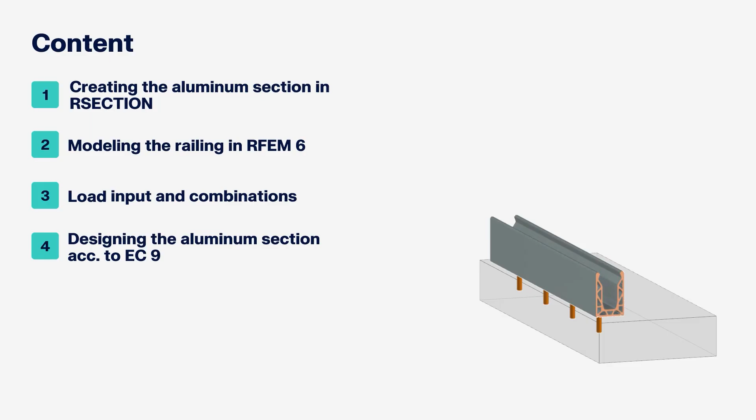The focus is on an aluminum base profile. This profile is anchored to a supporting surface with screws. The glass panel is fixed in place using clamps within the base profile. Step by step, I will demonstrate how to model the system in RSECTION and RFEM and how to design it.

Using the aluminum design add-on, I'll compare two different modeling approaches, one using members and the other using surfaces. The goal is not only to show you how the software works, but also to highlight how the modeling approach influences the structural behavior and ultimately the design results.

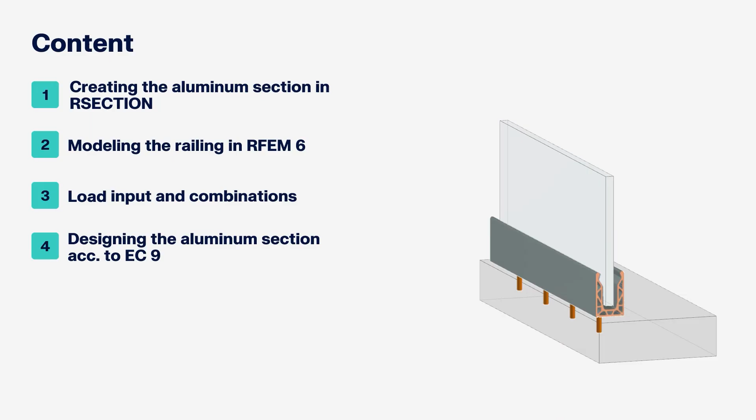Cross-sections in RSECTION can be created in various ways: via graphical or tabular input, by importing a DXF file, or using a script or the API. In this webinar, I will show how to create a cross-section using a DXF file. To do so, I open the import dialog via Import DXF, and then I choose the corresponding DXF file.

Three import methods are available with the Create DXF Template for further editing. The lines in the DXF file are imported as simple lines, which can be used as modeling aids. The other import options automatically generate elements. These are required for section classification, effective cross-section calculation, and thin-walled analysis. They are also necessary if the section will later be converted to a surface model in RFEM, as only elements are converted into surfaces, and the surface thickness corresponds to the element thickness.

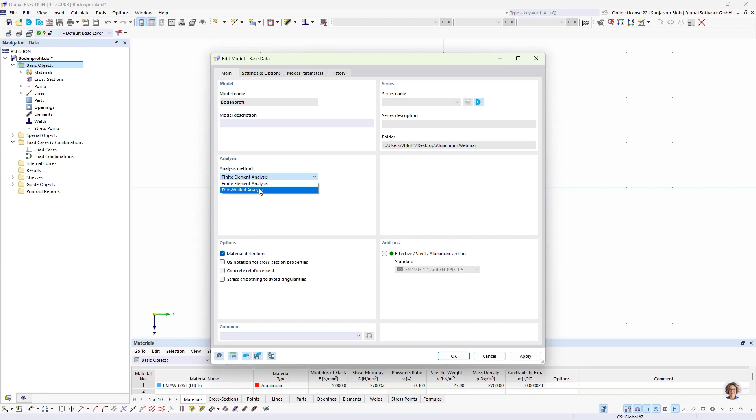In the base data, I select the analysis method. Two options are available: the finite element analysis and the thin-walled analysis. I opt for finite element analysis. Next, I create the part, which is required for all analysis methods in RSECTION.

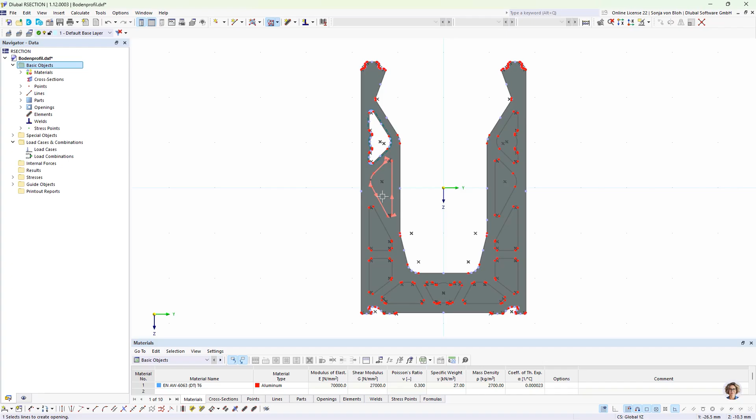Using the Select Boundary function, I select an outer contour of the cross-section, and then the part is generated automatically. I then define an opening, also using the Select Boundary function, clicking on the corresponding lines to create the openings.

To improve clarity, I hide the parts and openings in the display navigator. Next, I create elements, which is necessary for cross-section classification and for use in the conversion to surfaces. Since the section is symmetrical about the z-axis, I model only half of it and create the other half using mirror. I generate elements with the function Create Center Elements between parallel lines.

Only two parallel lines need to be selected, and then the element is created automatically. Its thickness is derived from the spacing between the lines. I will do this for all elements now.

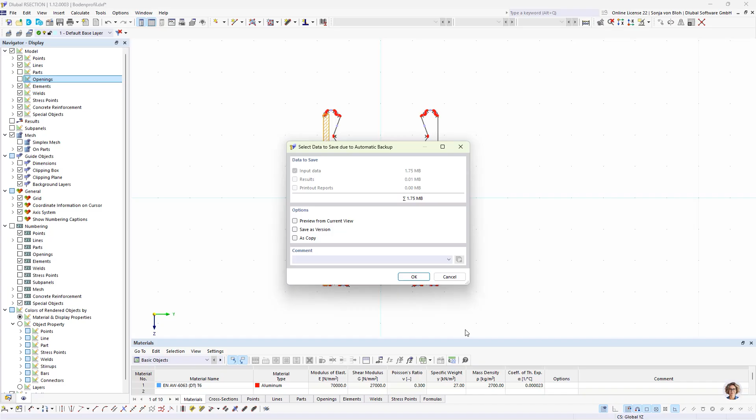Afterwards, I extend the horizontal and vertical elements on both sides. For this, I select first the horizontal elements and then the vertical elements, and use this function to extend to the next line or element. Here I extend both element sides. I do the same for the diagonal elements, selecting first the elements which I want to extend.

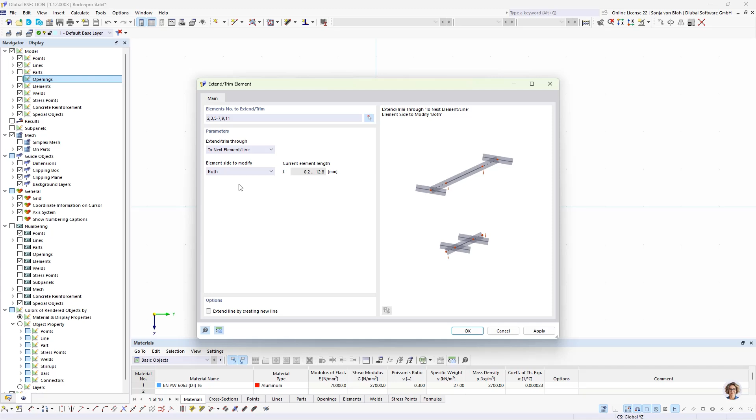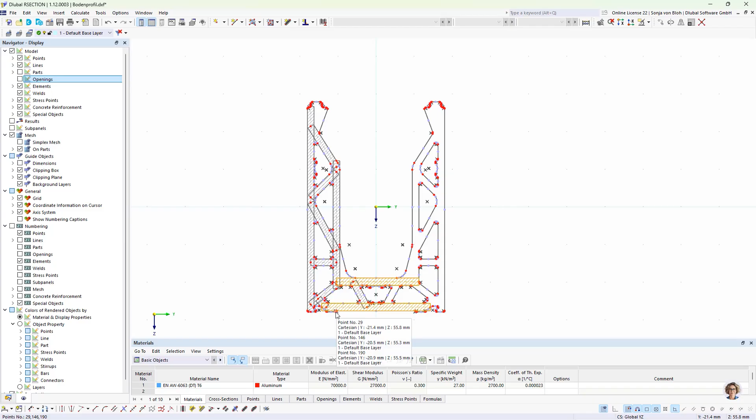And then I choose again this function to next line or element, and I modify both elements sides. Since I only want to model half the profile, I shorten the horizontal elements, these elements, by setting the y coordinate of the 2 points that you see here to the 0 point.

The elements are not yet connected. To do this, I use the connected lines and elements function, and I select the entire cross-section using a selection window. I delete 2 redundant elements, here this element, this.

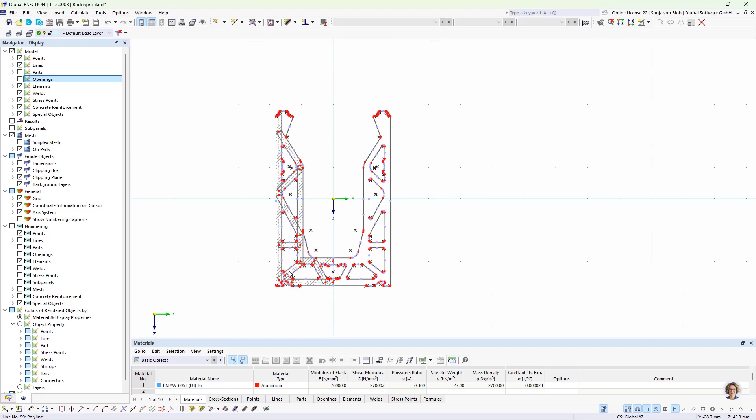Then I select all elements and choose now the mirror function. I want to create a copy. Mirroring axis is the z-axis and the point is the 0 point.

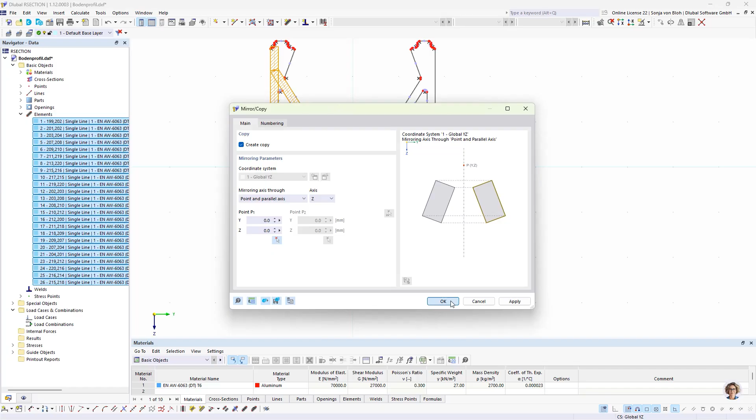Now the cross-section is complete, so I can save this cross-section. And then I move on to modeling the railing in RFEM.

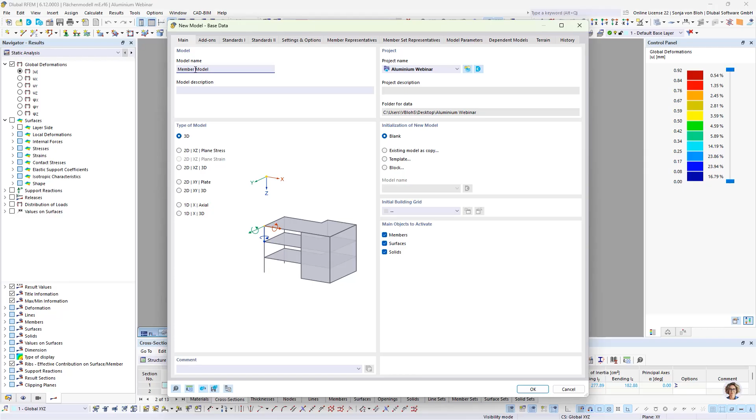First, I show the creation of the base profile as a member with a glass pane rigidly attached. I create a new model via File, New, and I name this model Member Model. I select the type of model 3D.

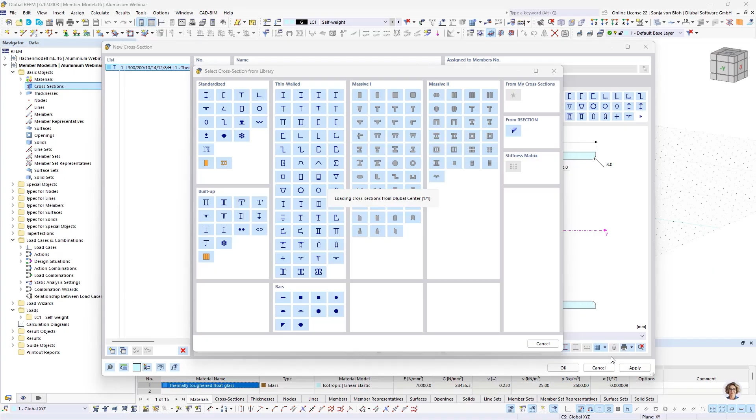I then import the aluminum profile via New Cross-Section. I open here the cross-section library from RSECTION, and then I choose here the base profile. The material defined in RSECTION is retained.

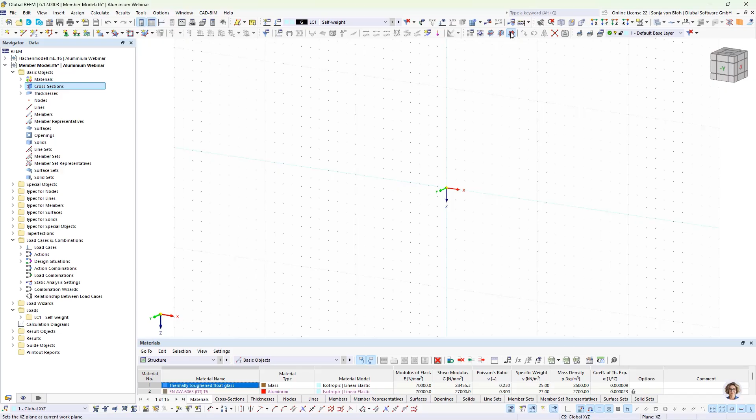I set the work plane to XZ and enable the view in negative Y direction to simplify modeling.

The member is created using this function single general. Here I choose this RSECTION, cross-section, and I use the input mode length and direction. Here I define an angle and work plane of 90 degrees and a member length of 1200 millimeter.

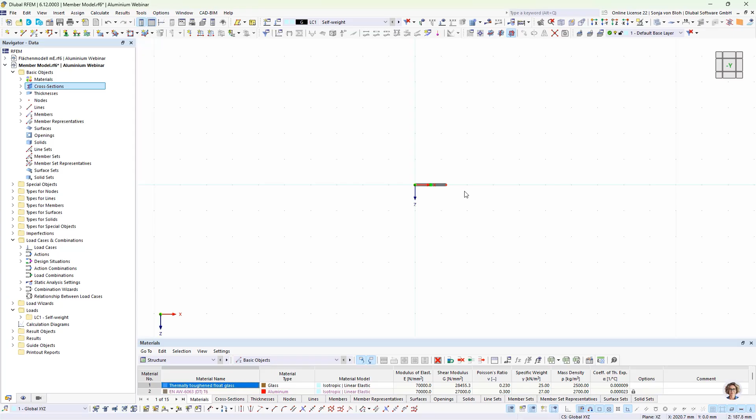Now I create the glass panel. I select the member line and use then this function move copy. Here I want to create a copy. I define a displacement vector in negative z direction about 900 millimeter, and then I activate the step links option and link lines with surfaces to automatically create the surface.

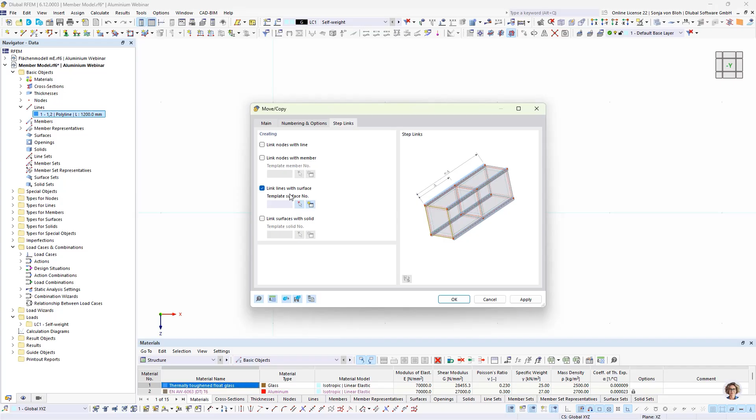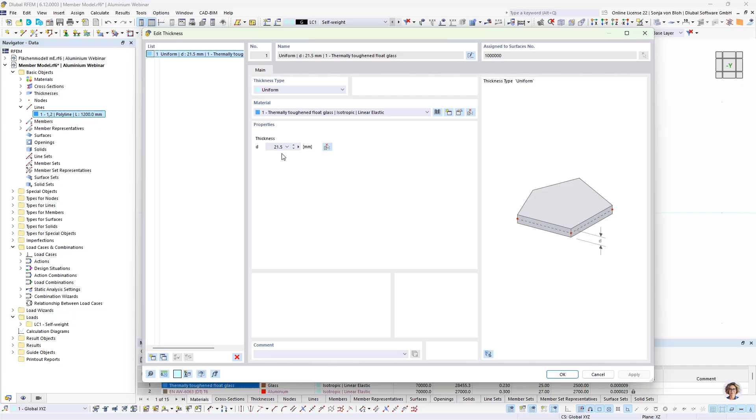For the glass surface, I create a new material, or I have already created it. It's a material thermally toughened float glass with a thickness of 21.5 millimeter. Then I click here on OK, and the glass is created.

With the glass design add-on, it would be possible to define the detailed layer structure of the glass. However, since this webinar focuses only on the aluminum base profile design, I skip this step.

At the location where the base profile is anchored to the floor, I create nodes. For this, I open the Edit Member dialog, and I use the option Nodes on Member to place nodes without splitting the member. The first screw is placed 100 millimeter from the start.

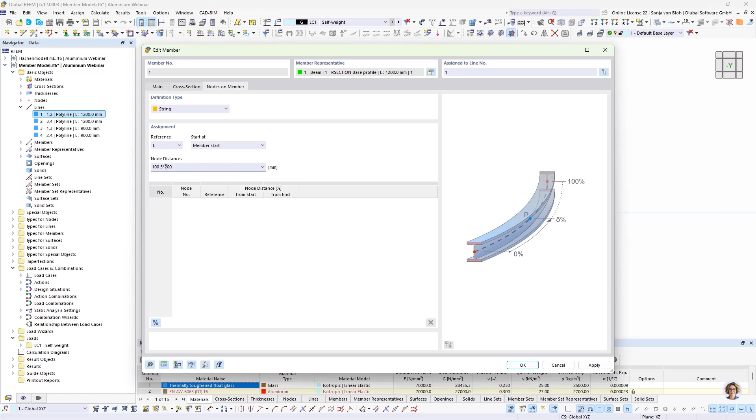5 more screws follow at 200 millimeter intervals. I define the node distances in the tab Nodes on Member, and I use the definition type string. Then I switch here to absolute distance, and now I enter 100 space 5 multiplied by 200. First the initial distance, then 5 repetitions of 200 millimeters.

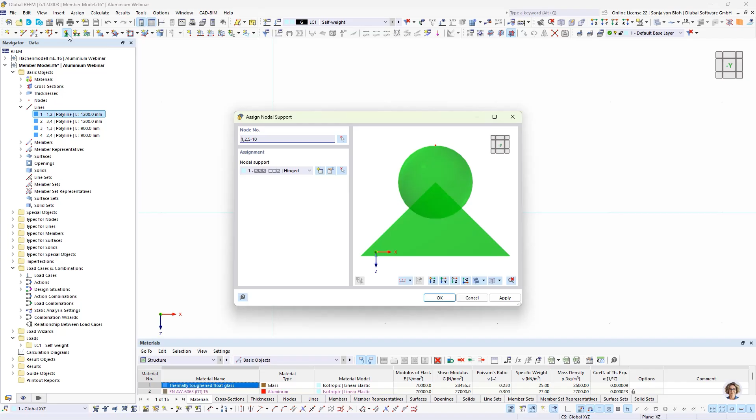I assign now on these nodes the supports. For this purpose, I select first the nodes, and then I assign nodal supports. Here I create a new nodal support. I don't need these nodal supports, so I delete them.

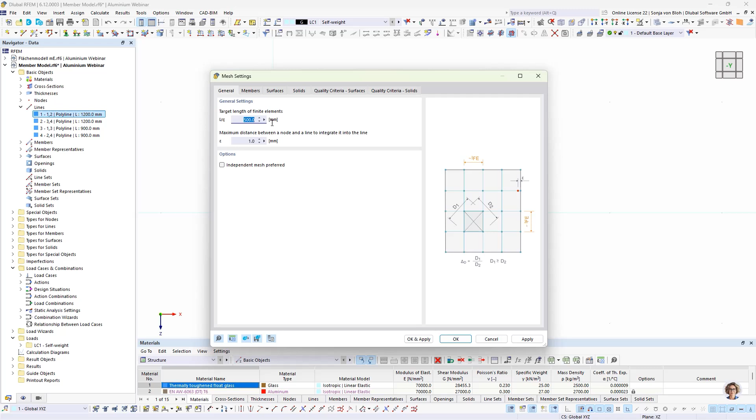Then I adjust the FE mesh in the mesh settings. And I want to define a target length of 50 millimeter.

Next, I define the loads. The load case self-weight is already created as a load case. The checkbox active self-weight is enabled so that the self-weight is generated automatically. I create a new load case named transom loads for the transom loads, and I assign the load category imposed loads.

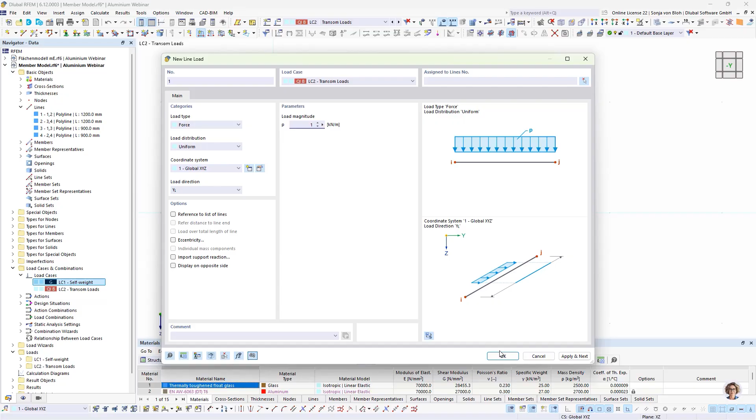In this load case, I define a line load, in load direction Y, and with a load magnitude of 1 kilonewton per meter. And I apply this load to the top edge of the glass panel.

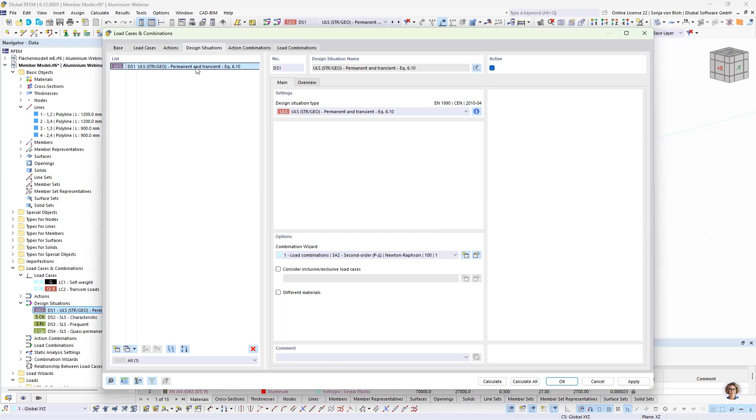Only ultimate limit state checks are performed. So I open here the design situations. I delete all serviceability limit state design situations, because I only want to do ultimate limit state designs.

The railing and loads are now fully defined. Next, I activate the aluminum design add-on in the base data. In the ultimate limit state configuration, I deactivate the stability designs because I only want to do cross-section checks.

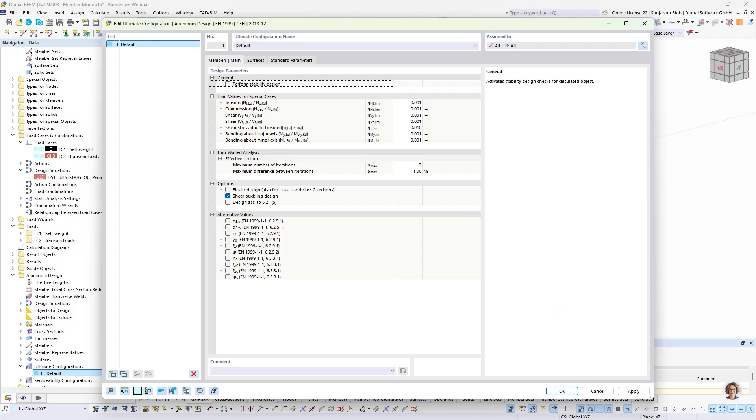Then I switch to the aluminum design tables. I only want to design member number 1. Now I start the calculation.

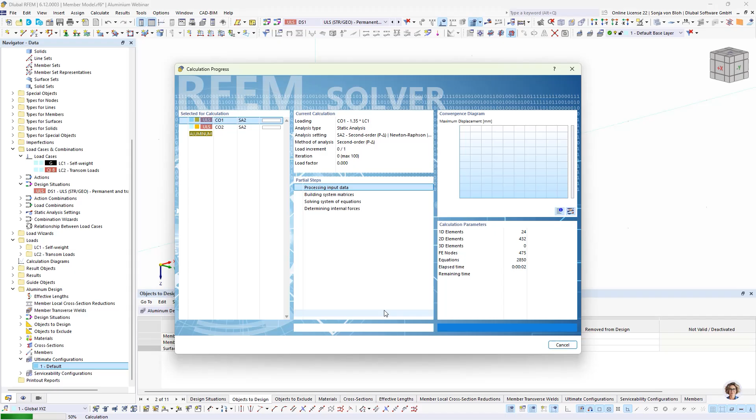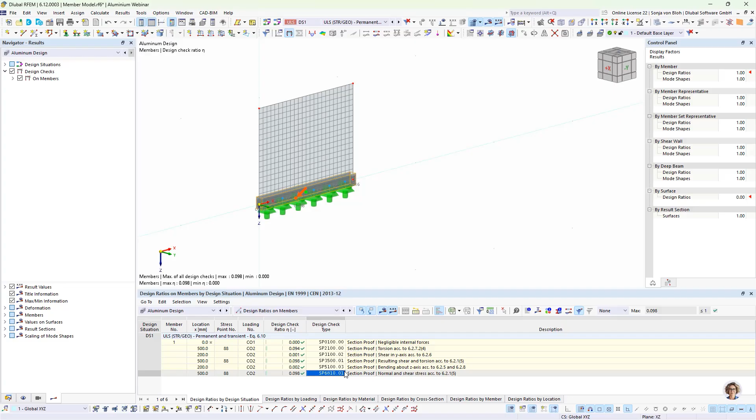The results show a very low utilization of the profile. This is expected as the member model can only represent idealized loading. Local effects like point loads from clamps pressing on the web of the cross-section are not captured and therefore not included in the design. To consider such effects, a more detailed surface or solid model is required.

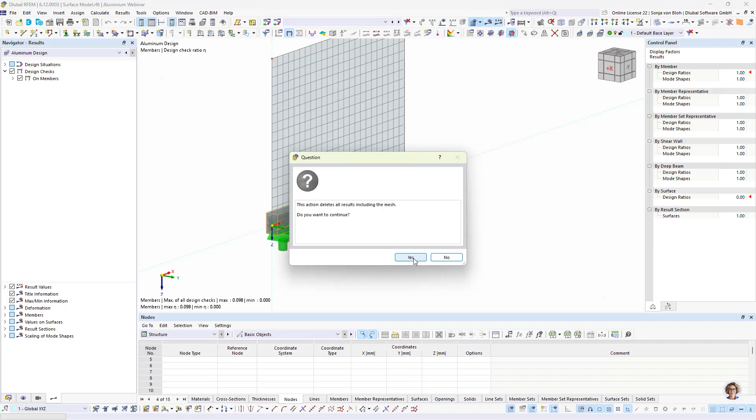Now I want to show you how such a surface model is built. So I save this file and I use the previously created member model and save it as surface model. I then convert the member into surfaces using the function generate surfaces from members. The elements defined in RSECTION are automatically converted into surfaces with the corresponding thicknesses.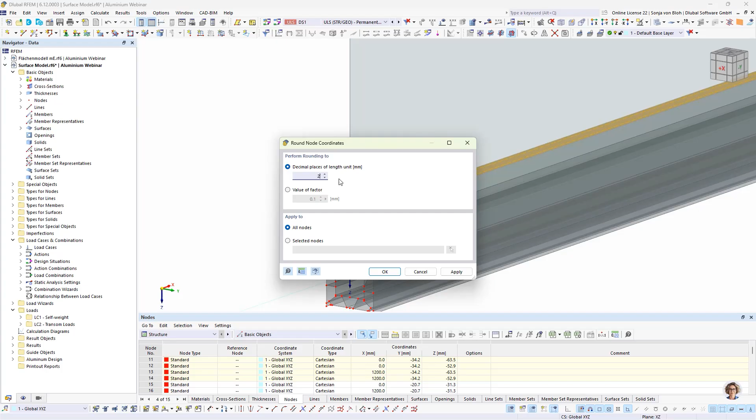I open such a surface here, and you see that the thickness of the surface corresponds to the thickness of the element. I round node coordinates now to 2 decimal places to eliminate inaccuracies.

Next, I move the glass panel to its real installation position using the move function. Here I define the displacement vector by picking these nodes. The displacement should only be in Z direction.

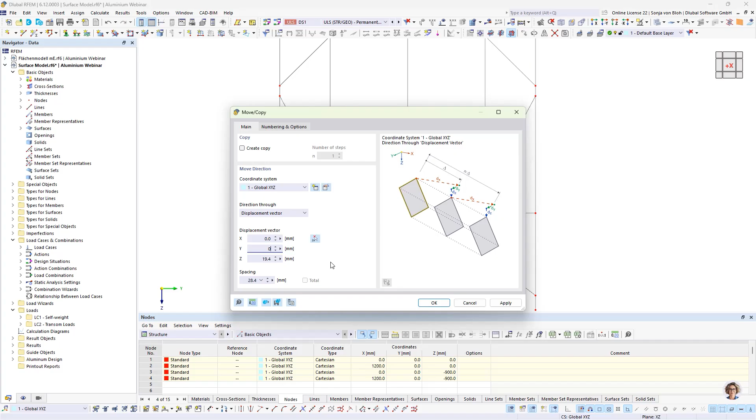In the 2 bottom surfaces that I now select, I create openings for the screws. As the openings span multiple surfaces, I merge them into single surfaces by deleting unnecessary ones and redefining the surface boundaries. So I delete now the unnecessary surfaces and then I modify the surface.

Here I choose the boundary lines of the whole surface. Same for the bottom surface.

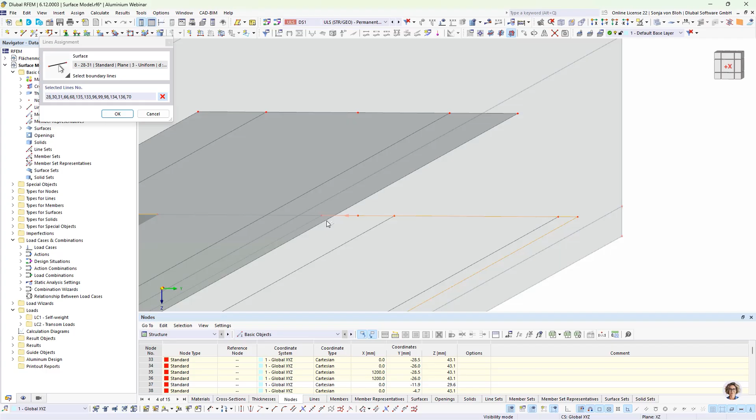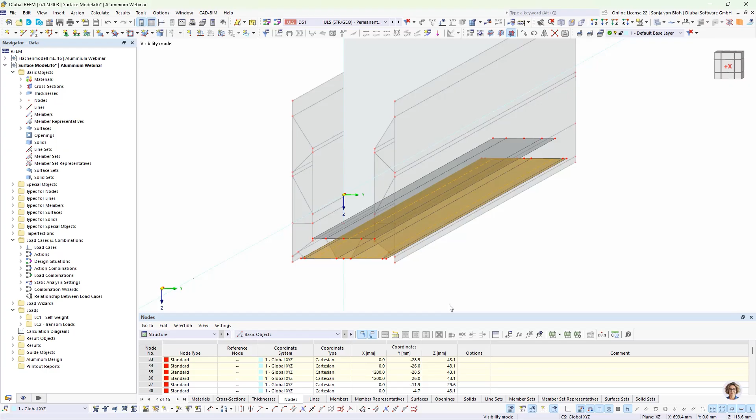The center of the first screw hole is located 100 millimeter from the beginning of the base profile. The screw holes are spaced at intervals of 200 millimeter to create the center points of the first hole. I copy these center nodes in X direction with a displacement vector of 100 millimeter.

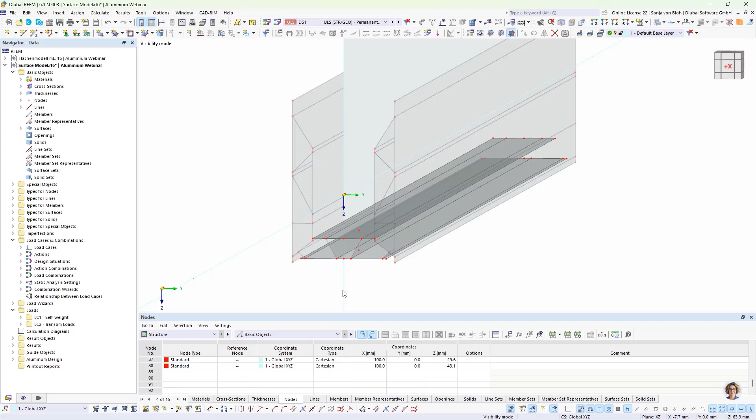Then I activate the work plane XY, and now I create the openings on the lower surface. The openings have a radius of 7.5 millimeter, and on the top surface they have a radius of 14 millimeter.

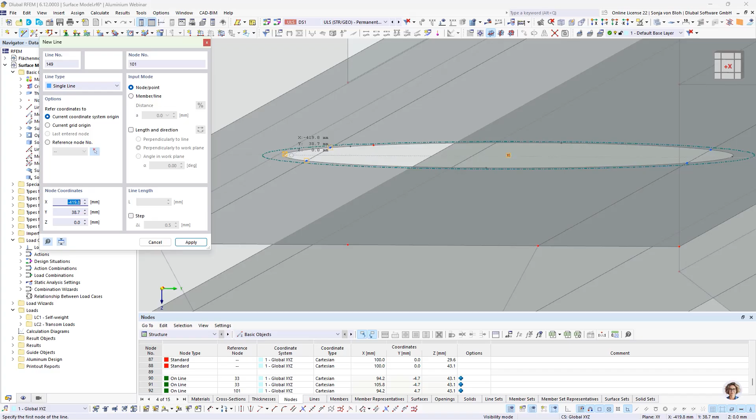The diagonal plates also require openings at these positions. I define boundary lines for them. So I create now the boundary lines for the openings.

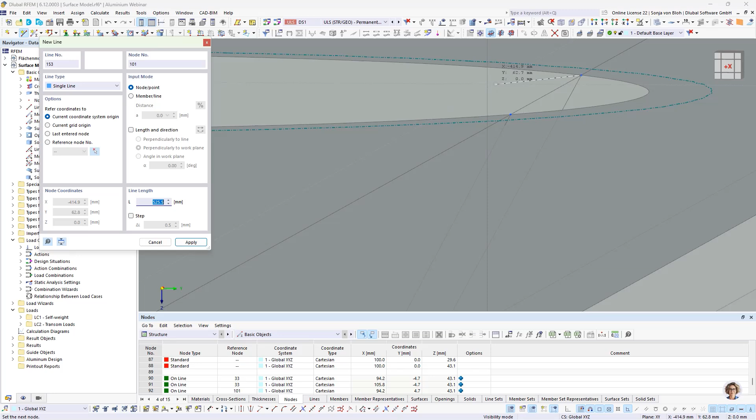I then copy these lines and also the openings 5 times in X direction with a displacement vector of 200 millimeter.

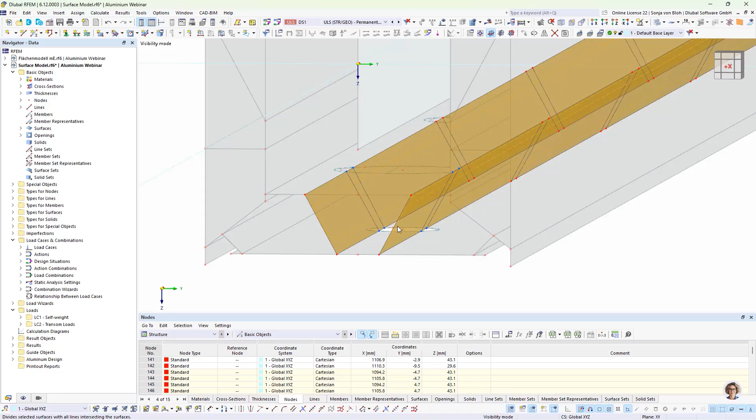Then I split the diagonal plates. To do this, I first select the diagonal plates, and then I use the function divide surface with intersecting lines. Then all I have to do is to remove the openings.

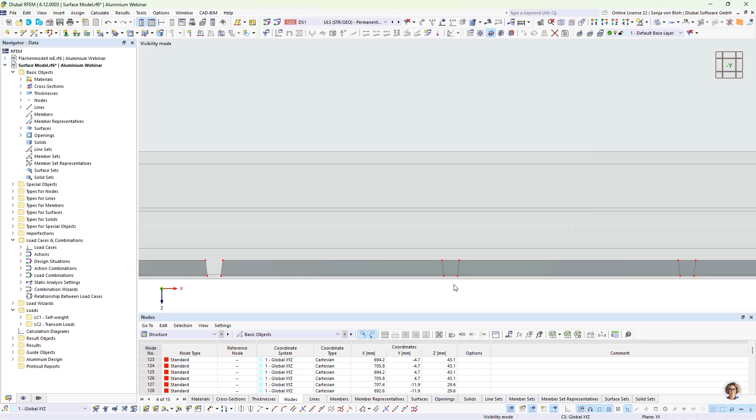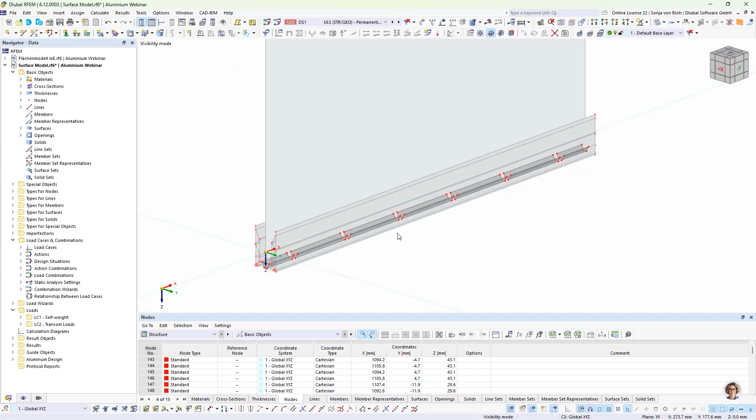In the next step, I define the contact between glass and my clamps. The glass pane is fixed at the top and bottom edges using clamps, here on this top edge and this bottom edge.

The contact between the glass pane and the base profile is modeled using surface contact. For this purpose, the relevant surfaces are divided according to the spacing of the clamps.

Each clamp is 80 millimeter wide and positioned 80 millimeter from the start of the base profile. The distance between the clamps is 160 millimeter.

To model this, I copy the 4 edge lines 14 times in x direction with a displacement vector of 80 millimeter.

I then divide the surfaces along all intersecting lines. For this purpose, I first select the surfaces and then I use the function divide surface with intersecting lines.

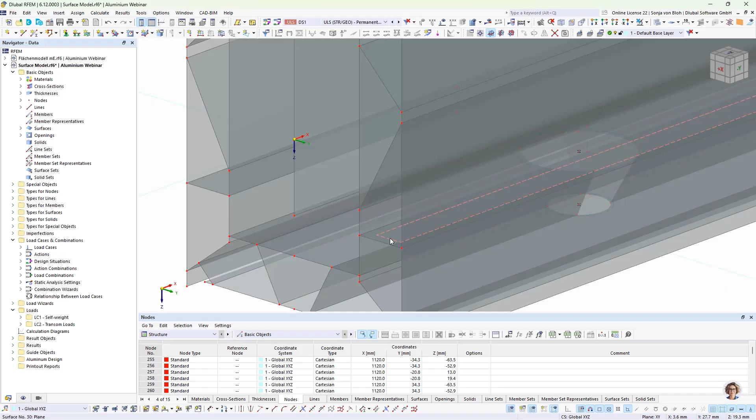To do this, I first define a visibility. I select the corresponding surfaces and then I define the surface contact.

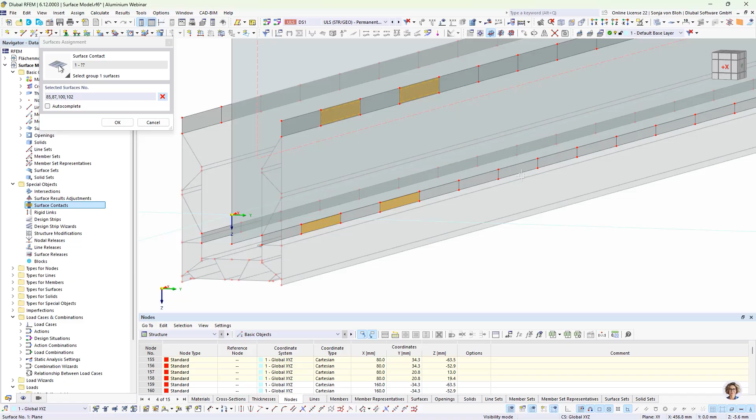In group 1, I choose all the surfaces where the clamps are located, because we have only a contact between clamp or a contact at the clamp position between glass and my webs of my base profile.

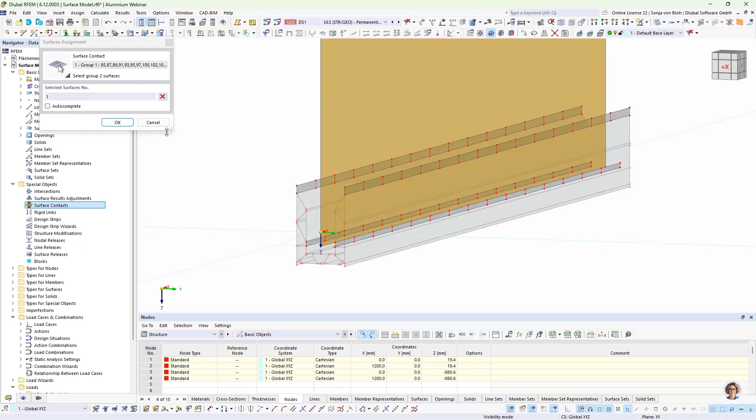Surface number 1 is my glass pane. Then I have to define the surface contact. Contact perpendicular to surfaces fails under tension. Then I want to consider also a contact parallel to surfaces with a little shear stiffness.

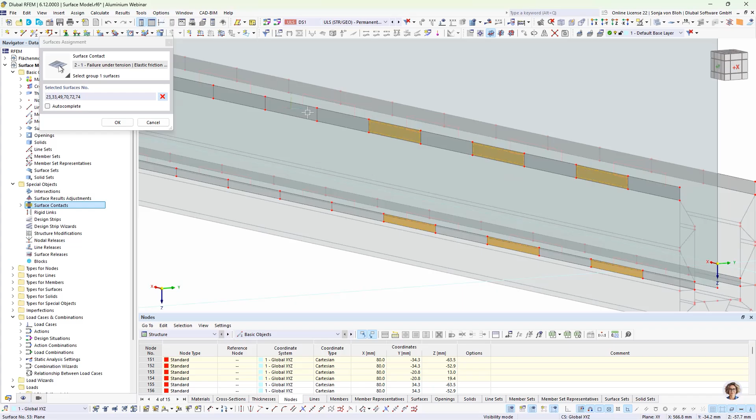I have to define this on the other side too. So I create a new surface contact. Then I choose the corresponding surfaces where the clamps are located, and then the glass pane.

At the clamp positions, the glass pane can bear on the base profile. These contact conditions are modeled using rigid links between the lower edge of the glass pane and the surface of the base profile. In some cases, screw holes are located within the contact zones of the base profile surface.

Since rigid links can only be defined where no openings exist, I split the line at the bottom edge of the glass pane in the areas of the openings. The rigid links are then only applied in the segments of the clamps that are outside the openings.

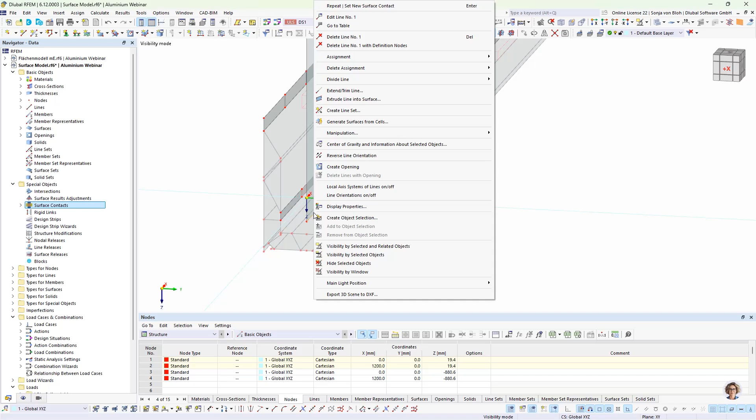I first divide the lower edge of the glass pane into 15 segments of 80 millimeter each. For this, I use the divide line function.

I then copy the arcs of the first 2 and last 2 openings to the elevation of the lower glass edge. The other clamps are located outside the screw openings.

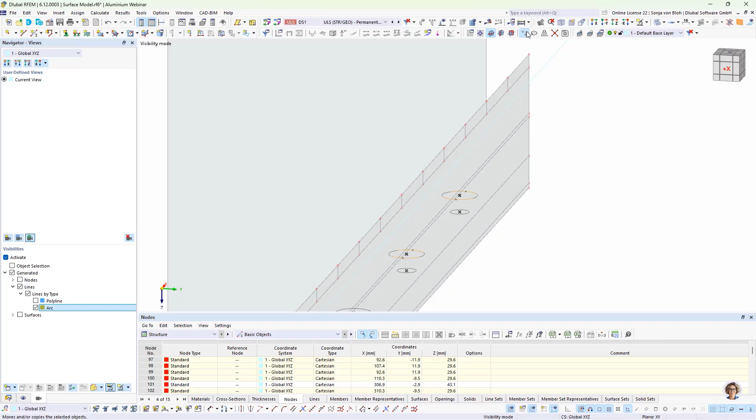For this purpose, I use a visibility, and here I choose the arcs of the first two openings and of the last two openings. Then I copy these arcs to the lower glass pane.

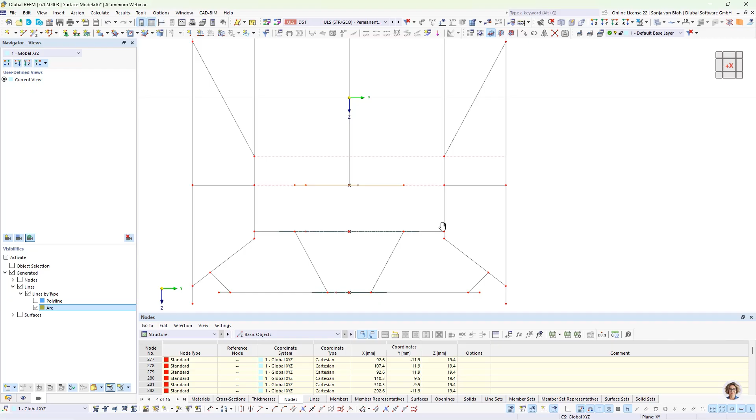And then I use the connect function to define the nodes on the intersecting points. I don't need the arcs anymore, so I delete them.

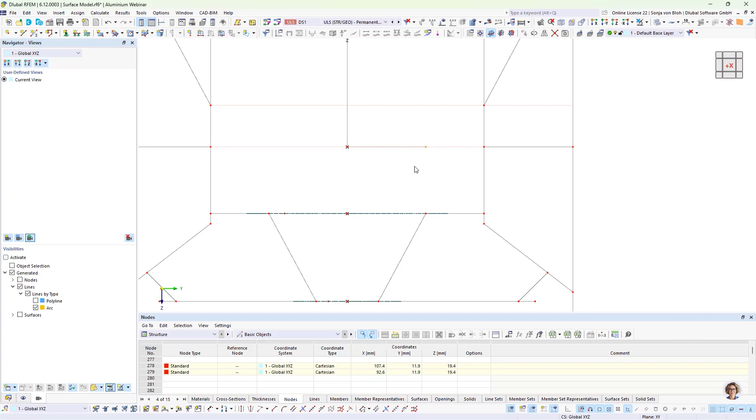Then I can create my rigid links. For this purpose, I define a visibility. And now I define the rigid links.

You find them here in the special objects. I create a new rigid link. I want to define a rigid link line to a surface. Then I have to define a line hinge

where I activate the hinge in uy. And here I want to use also a nonlinearity fixed if negative, since it's only possible that the glass pane bears on the surface if there is a compression force. If there is a tension force, then there is no contact between the base plate of the profile and the glass clamp.

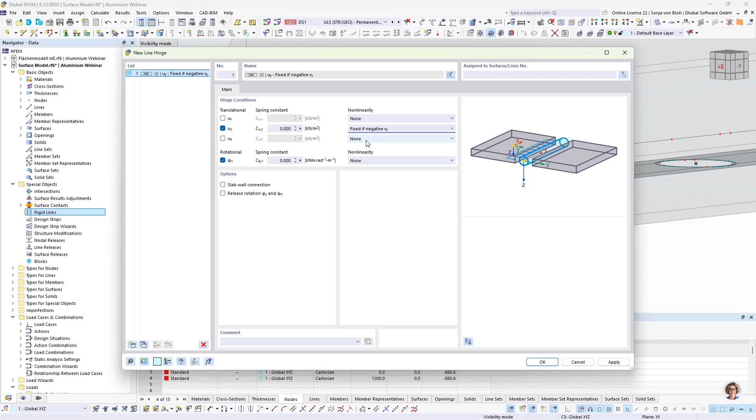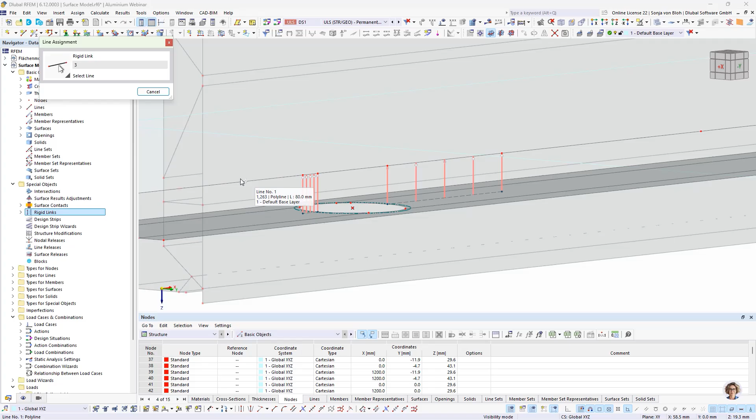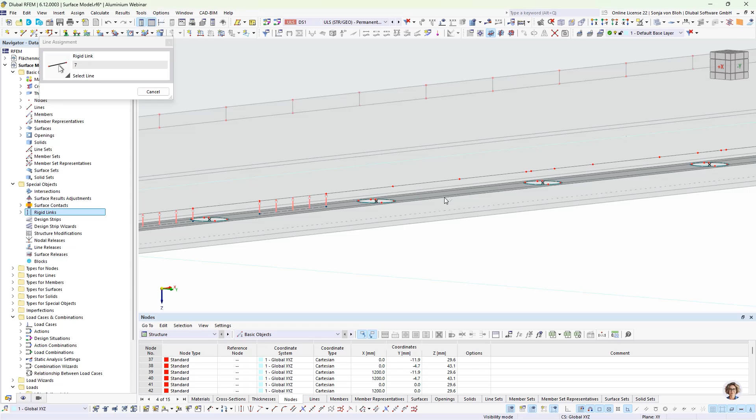Then I pick the line and the surface. I will do the step, and now the last clamp.

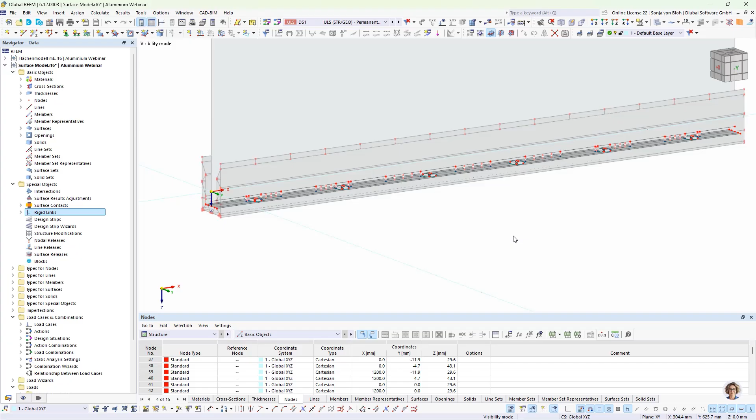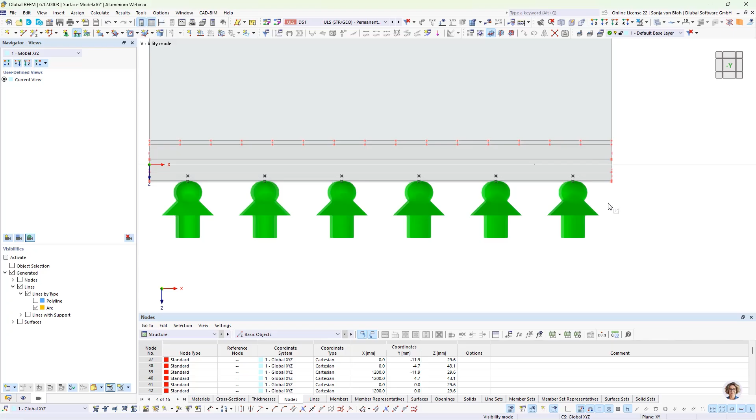The support provided by the screws is modeled at the openings using hinged line supports. I will do this afterwards, using also the visibility of the arcs. Here I create a hinged line support on these openings.

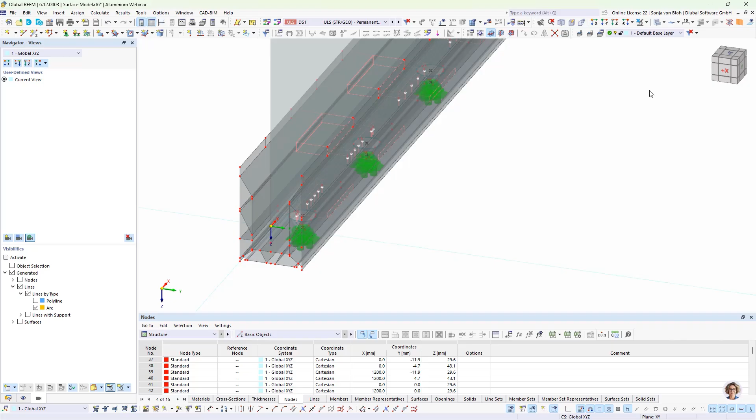The base profile itself rests on the substrate. This support is modeled using a surface support with failure under tension, meaning the support becomes ineffective when the contact stress in the Z direction is negative. I will do this now: select the surfaces of the base plate, then assign surface support.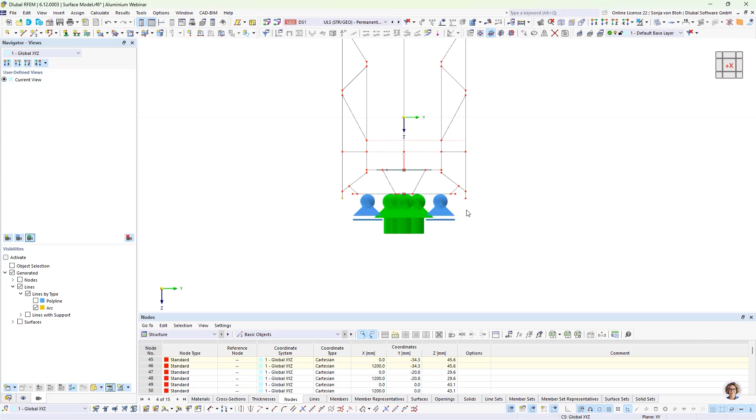Additionally, the edges of the base profile are supported by line supports, also with the condition failure if PZ is negative, so these supports are only active in compression. I select the two lines and create a new line support with this condition.

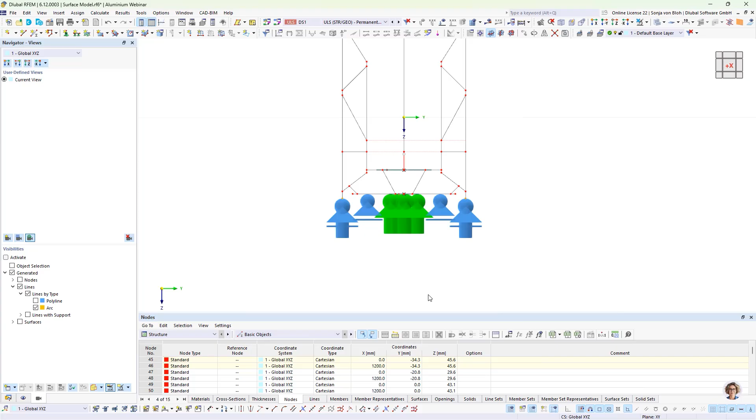Next, I define the FE mesh. I assign a surface mesh refinement to all surfaces of the base profile with a target element size of 4 mm. I select all surfaces, edit them, activate the mesh refinement, and assign a target length of 4 mm to all of these surfaces.

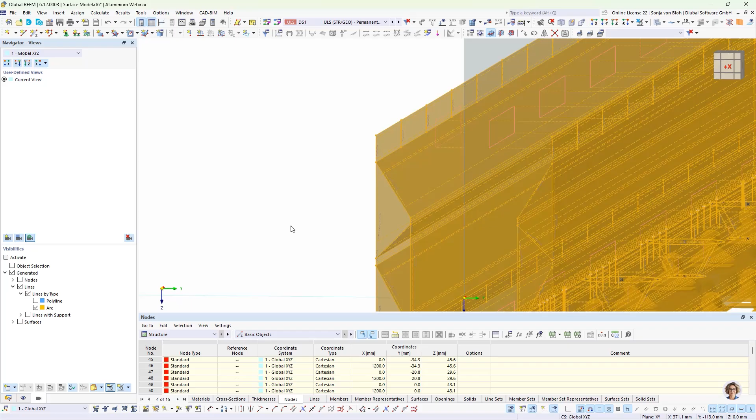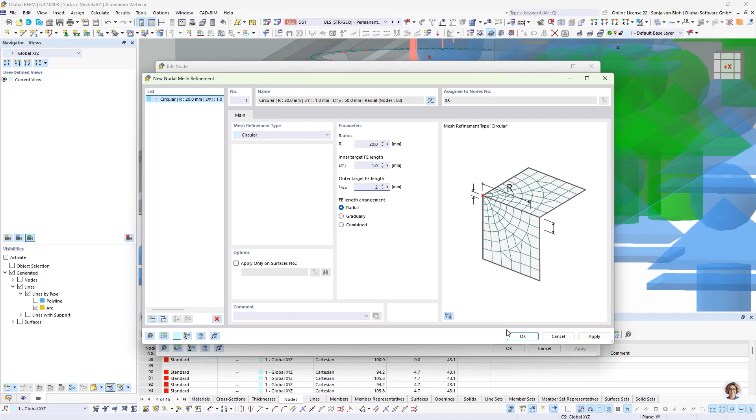In addition, I define a circular nodal mesh refinement at the center of the bottom opening. I edit this node, activate the mesh refinement, and define a radius of 20 mm. The inner target FE length should be 1 mm and the outer target FE length should be 2 mm. I then copy this mesh refinement via the move copy function, 5 times with a displacement vector of 200 mm.

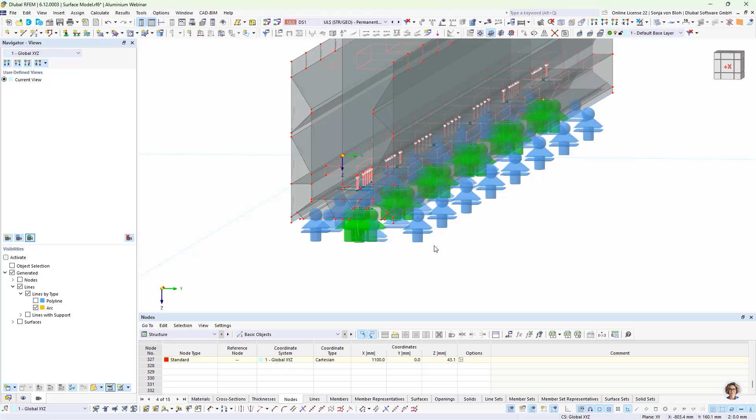In the next step, I configure the aluminum design settings. For the design, I select on the table all surfaces of the base profile to design. No further settings are required. Since I already performed the calculation in advance, I now open the pre-calculated file.

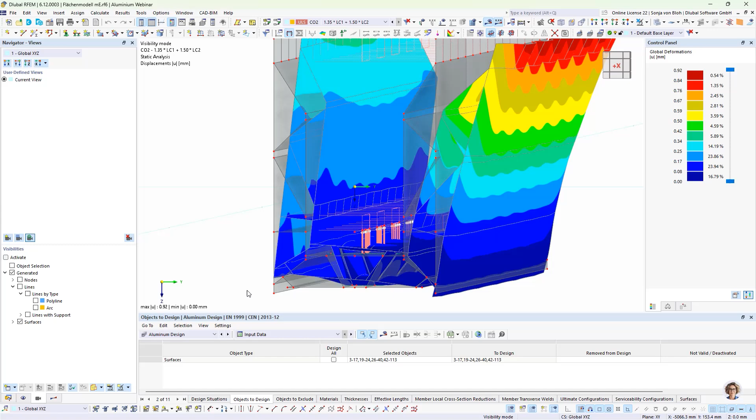The deformation clearly reveals the upward bending of the floor profile. They also illustrate the lifting of the cross-section from the substrate and the restraint provided by the screws.

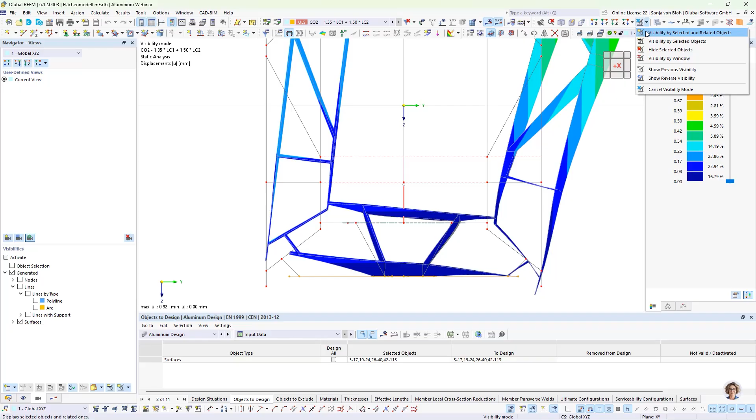So I will show you only the surface where we can see the deformation of the base plate. These effects cannot be captured with a simple member model.

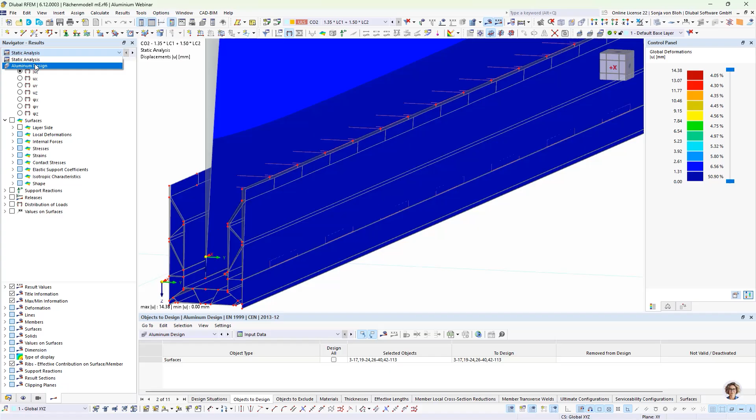Then I switch to the design results, the aluminum design. Here you can see that the design results also confirm that the surface model leads to significantly higher utilization of the base profile compared to the member model. Local stress concentrations occur particularly in the areas around the screw holes and in the lower web region.

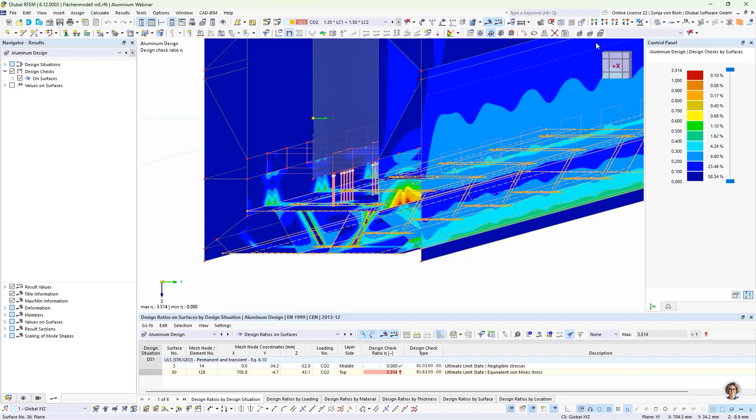So I show you this now. These zones here have a greater material thickness. However, for the purpose of this calculation, I used a reduced thickness to obtain conservative results. It would therefore be advisable to model the component thickness in more detail in these areas to achieve more realistic design results. This concludes the key differences between the member and surface models.

Thank you for your attention. I now hand back over to Andreas.

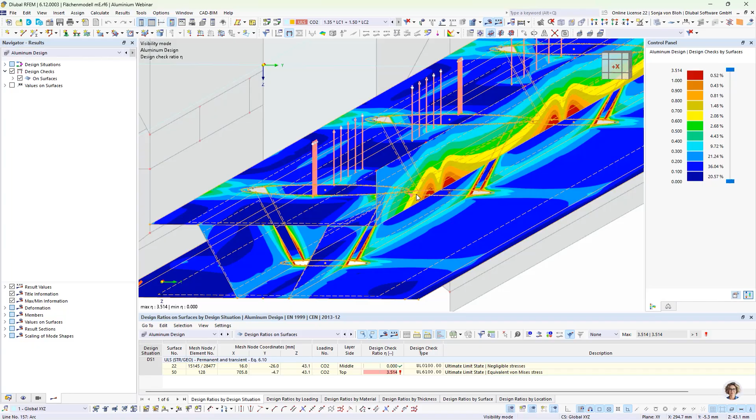Thank you, Sonja, for your presentation. I have an additional hint for you.